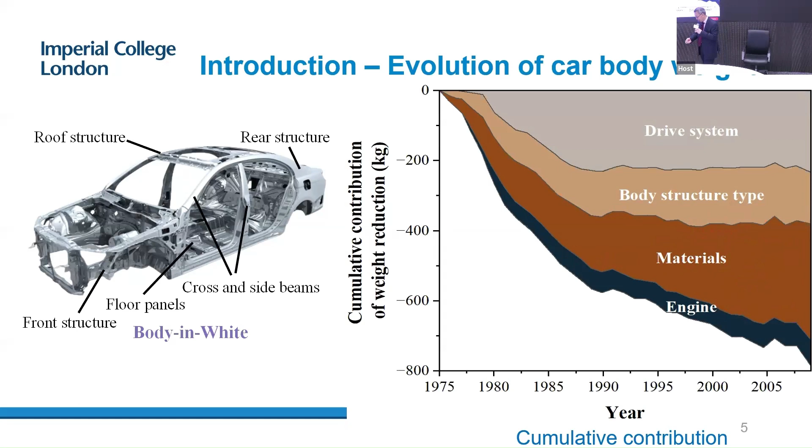Over the last 30 or 50 years, there has been a lot of research on using materials, on how to use high strength material or light alloys to reduce the weight of vehicles. This is a continuous job, and it has a big effect on the car body and chassis structures.

If we consider the use of materials, we collected some data and made predictions from 1977 to 2040. The use of steel becomes less and less over the years, and aluminum should become used in higher amounts, while magnesium alloys stay more or less constant. For the car body and chassis structures, 80% will be metals, and polymers and composites will stay fairly steady because they are too expensive to use for car body and chassis structures.

If we talk about steels, even though they decrease over the years, steel has different grades. Low strength deep drawing steel will become less and less and will be minimized over the years. Current high strength steel will be reduced as well. Third generation steel will increase, and ultra high strength steel will increase because the materials become harder and more difficult to manufacture.

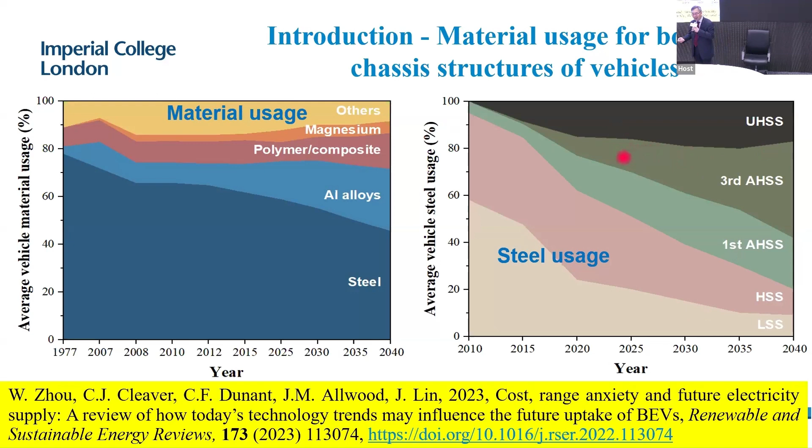If you look at this diagram that shows elongation, this is the relative strength of materials, which is the strength divided by the density. We draw this horizontal line at about 25%. Above this, the materials can probably be formed using stamping technology, cold stamping technologies, and it's fairly okay. But below this it's very difficult.

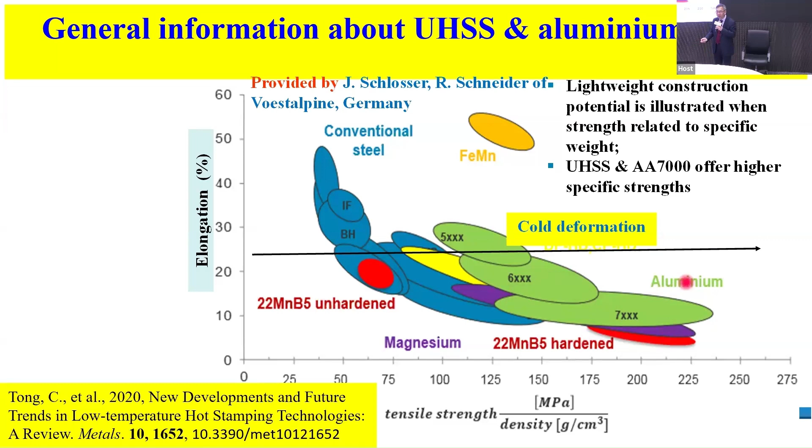We can see aluminum 6000 series, 7000 series, and boron steel, which is ultra high strength steel, are very difficult to form. We have to think of another way to do this. To solve the problem, there is one technique that has become popular in the world: steel called boron steel. They put boron, the chemical element, into the steel to change the CCT diagrams.

I'm not going to talk about the material science here, but what I would like to say is that this is a very successful development for boron steels. Over 500 production lines are available in the world, and every production line can produce 1 million components a year, with a lot of applications.

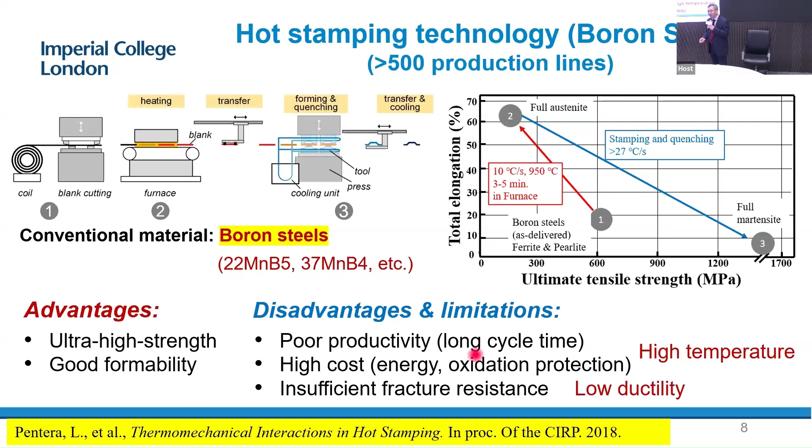I'm not going to discuss the details about the technology, but basically we increase the temperature of the material, then form it and use cold die quenching to get martensite, achieving very high strength material. This has a lot of advantages: ultra high strength, and it saves material while making the components lighter. But the productivity is lower for this, with issues like high temperature, cost, energy, and various other things coming out.

But even so, because of global requirements for CO2 emissions, what we do here can reduce weight and save energy. For example, Volvo has used this significantly over the years, and currently 29% of components on the Volvo XC60 generation 2 use hot stamping technologies. Many use boron steels. This has been a good achievement, and many places have followed up as well.

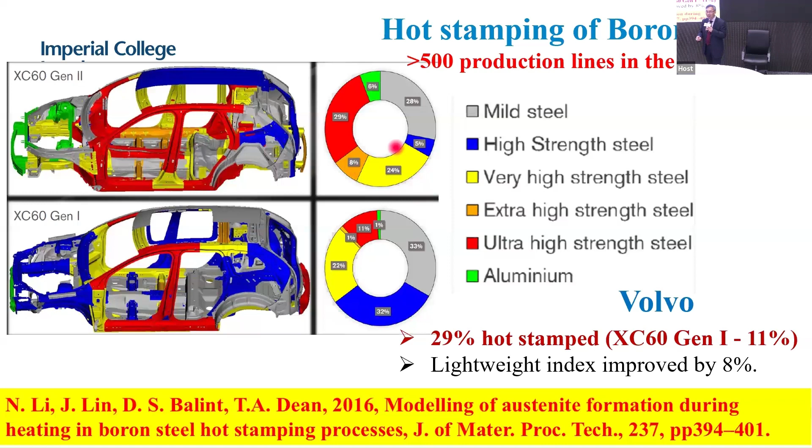In China, over 200 production lines are available nowadays, with a lot of applications for this. Generally speaking, for these technologies we increase temperature to about 900 degrees C, getting the steel into the austenite state, then we form it in a cold die and do the quenching.

I'm not going to give more detailed technologies, but if anyone is interested, you can look at our published papers—we have published many papers on this over the years. However, 900 degrees C is, we think, too high a temperature, causing oxidization, surface problems, and so on. So we tried to develop new alloys which can reduce the austenization temperature by 150 to 200 degrees C, which we call low temperature hot stamping.

Now, we have published some preliminary work, but it has not been used in industry yet. We have shown the advantages of this: we can avoid coating and other issues, and increase productivity significantly.

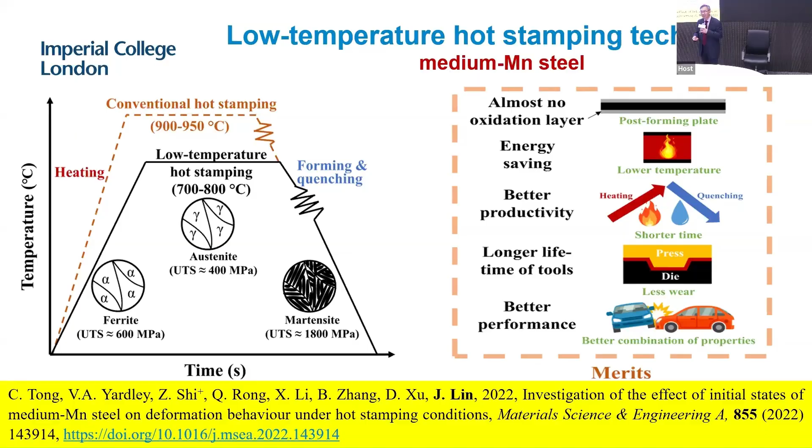Another technique, this is boron steel. We have to use hot stamping, and for new third generation steels we also need hot stamping. For aluminum alloys, there are particular features of the alloy that make it very difficult to form.

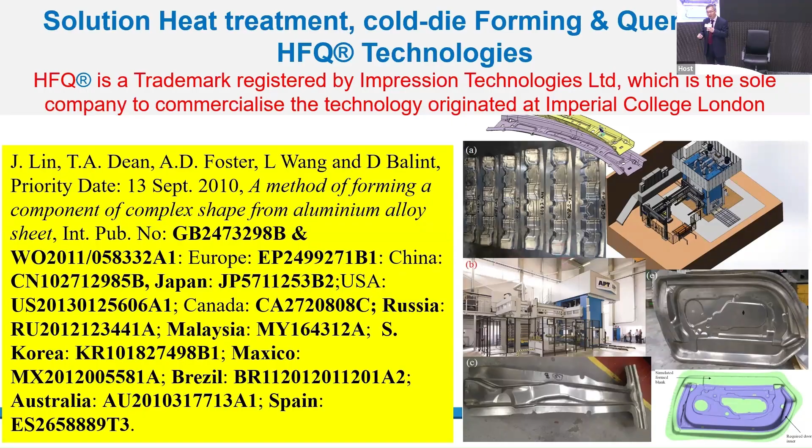So we developed a technique called HFQ technology to form the part, and this is a trademark registered by our spin-off company, of which I'm a founding director. We patented the technology in many countries, including all the countries in Europe and many places in Asia including Japan, and manufactured many components.

This has been used on car body and chassis structures. The first application was for the Aston Martin DB11, and now 24 components are manufactured using the technology. For Lotus, door inners - Lotus was the first company to use our technology. Now Lotus is controlled by Geely in China.

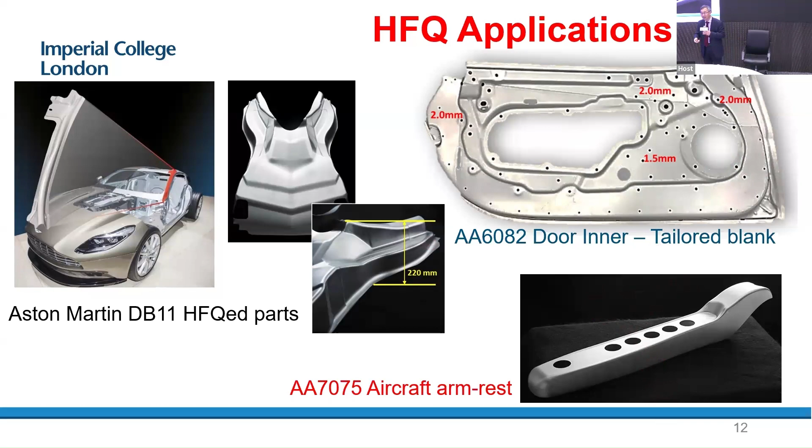And for aircraft applications, this is the armrest for an aircraft seat. Many parts have been manufactured using this technology.

But when we design a manufacturing process, especially hot stamping, it's not very easy. What we need to do first is a basic test: a uniaxial tensile test.

But it's very difficult to generate this data because it's a new technology nowadays, and until we developed the techniques, nobody in the world could generate data to get the forming limit.

The reason is that in the hot stamping process, you increase temperature to a certain level to do the heat treatment for the material. Then you need to drop the temperature to a certain level with a controlled cooling rate. With that controlled cooling rate, you then do tensile or other testing to get the data. But it's very difficult to control the cooling rate, and this is a problem. How do we do this?

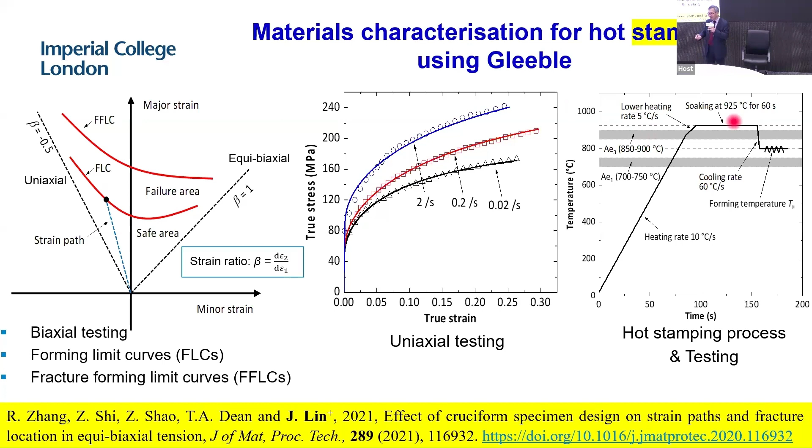There are a lot of international standards available for uniaxial and biaxial testing, but it's very difficult to control the temperature profile required by the materials and the industry process. That's the big issue. This forced us to develop something to generate the data.

What we do is use a Gleeble material simulator - probably people will know this, it's the model 3800. The machine is developed in America by DSI, and we bought this and developed various techniques based on this facility.

First, we create the specimens - here is the tensile specimen and the biaxial specimen. We use a camera, and we paint the specimen. You've probably heard of the DIC method, digital image correlation scheme, to collect the data and work out the strain fields.

But the problem is that when the material is close to failure, the paint disappears or peels off, so it's difficult to get data at a later stage of deformation. This is crucial - previously it was difficult to get data beyond about 60% of deformation, and it's difficult to judge after that.

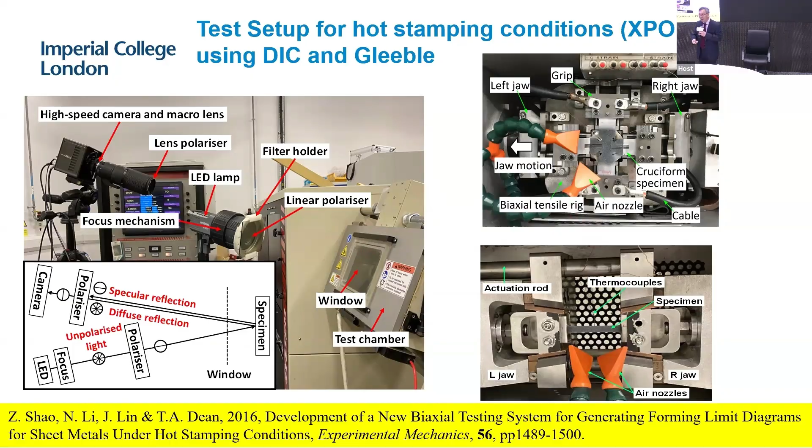So we developed the cross-polarization method, which we call the XPOL method, to get rid of these reflection problems and still get the data. The results have been published recently, in 2024.

Here's an example using the aluminum alloy AA6082. Without cross polarization, we get data up to about 70% of deformation before the paint starts to peel off. At 100% deformation you can see the paint has completely peeled off and you can't get the data.

But with cross polarization, we get data almost to failure - for example at 90% and even 98% of deformation, we still get good data.

For the biaxial testing, we look at areas with over 60% deformation where the paint starts to peel off, because the paint is very brittle and difficult to keep on the surface. We tried various painting techniques, but it's difficult to solve this - at 90% deformation, a lot of the paint has already disappeared.

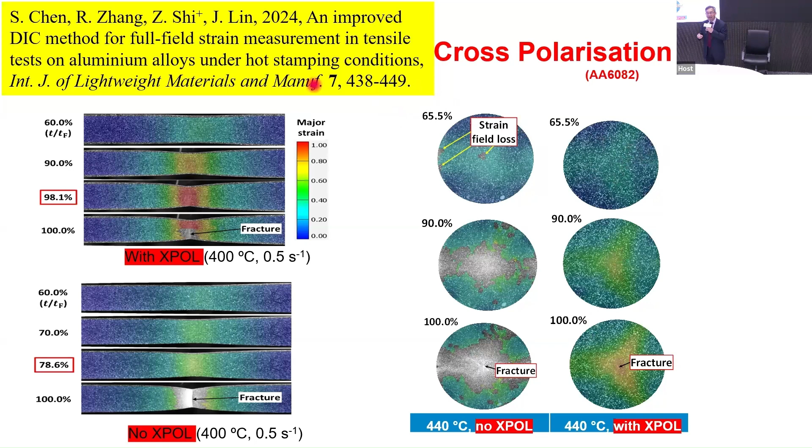But with cross polarization, you can see we can get data almost close to failure. If anyone is interested in this strain measurement using DIC, you can look at this paper for the detailed technique.

Okay, then we do the uniaxial tensile test. For uniaxial tensile test, previously we mentioned about we need to control the cooling rates. This is very important. The Gleeble can do this very well, and then we use the Gleeble to do this kind of work.

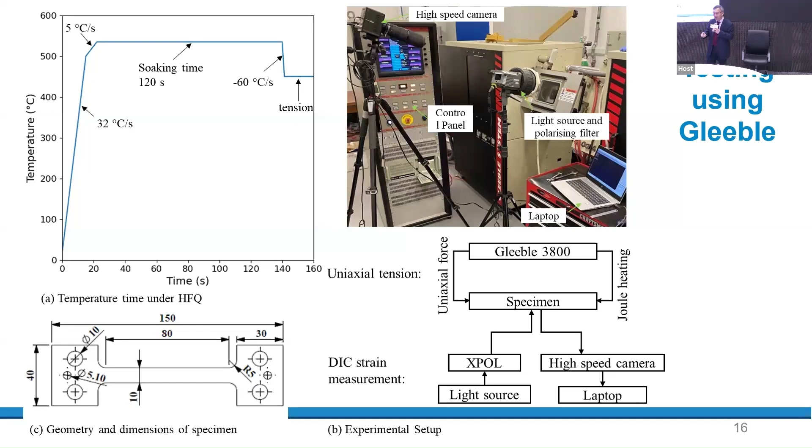But we published a lot of papers, a lot of research on how to control the temperatures. I'm not going to discuss this today.

Our challenge is how to apply the appropriate, proper displacement so that the maximum strain rate within the specimen equals the target strain rate. The target strain rate, for example, we put 0.5, which is very difficult to achieve using traditional methods.

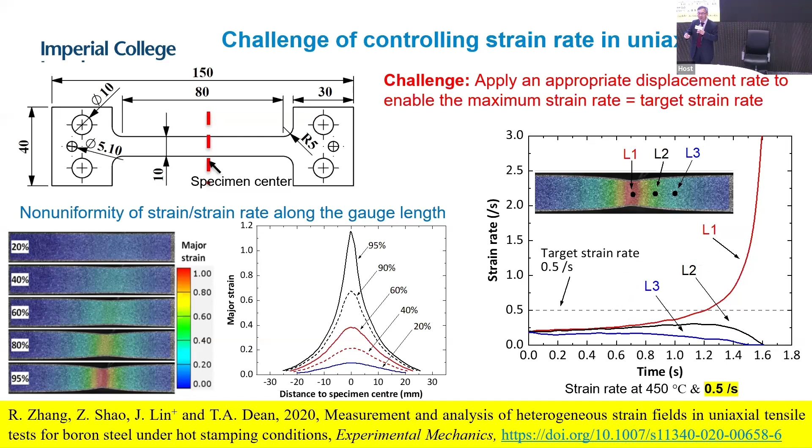Then what we think, okay, we use previous data, we know this is not correct, but we do the learning. People say this artificial intelligence, whatever I say, it's just machine learning, using data-driven experimental work.

We generate previous data, we just input the data in, and then use the data, we try to find the characteristics of the data, how to process this and so on, and present it in proper ways. And then we do the training and the learning.

Then we can set this up and go to stage 3. We can give a choice of what kind of learning method we choose, then generate data to control the displacement for the materials.

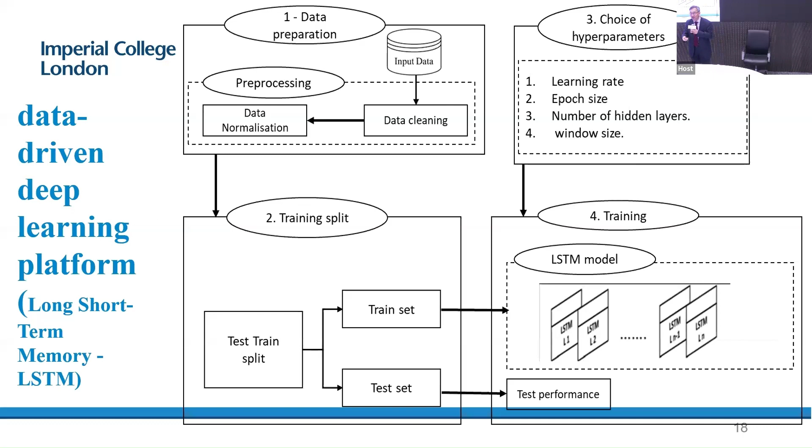At the end, through various previous data, we generate the data, then we know the displacement and the time. For any kind of test, if you give a target strain rate, then the system generates this automatically for you.

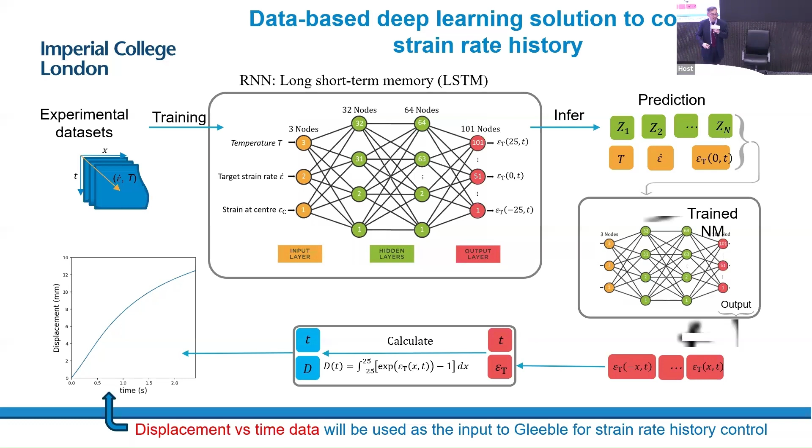Very simple. Just PhD students, mathematics students, are recruited and spend 6 months to generate the job. Very easy. Then we can use the data to compare this.

Previously, for the conventional method, the true strain development is like this. If you say the target strain rate is 0.1, and we try to set 0.1, but previously the strain rate is like this. The error is up to 1000%. The error is very high.

And if we set the target strain rate at 0.5, conventionally it goes like this. But with this kind of learning process, we can get more or less close to the target. The error can be controlled within 15-20%. It's difficult to get rid of the error entirely, but compared to 1000%, this is a huge improvement.

And what we really want is the stress-strain data. For example, for the target strain rate 0.1, this is true stress, and horizontal is true strain. Previously, when we did the test, because the strain rate was not properly controlled, we got data like this. But with proper control, we get data like this, which is significantly different.

For the strain rate 0.5, we observe similar features. And the flow stress error is about over 25%.

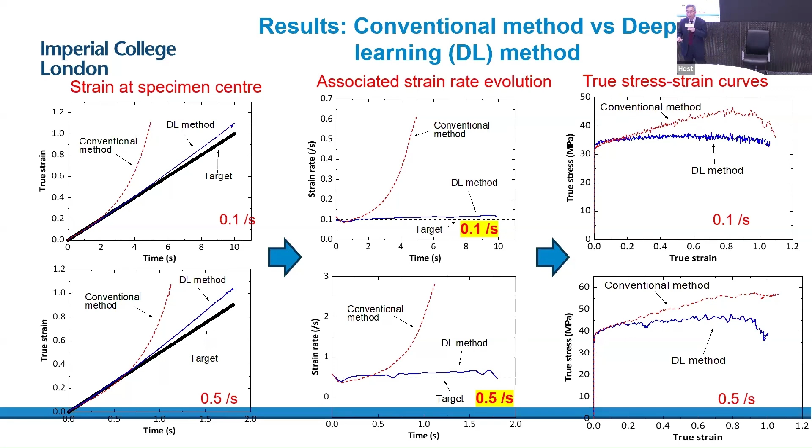Okay, and we tried this for different materials, different strain rates, etc. Then we can say the blue is the real material data, and this color represents the wrong conditions generated previously.

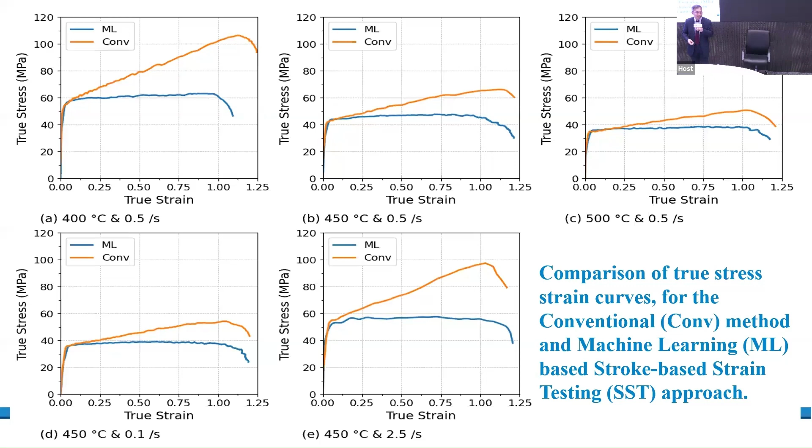Okay, then I move to biaxial testing for this. For biaxial testing, there is the international standard, ISO 12004, which we call the Nakajima test, and it's available worldwide for doing this.

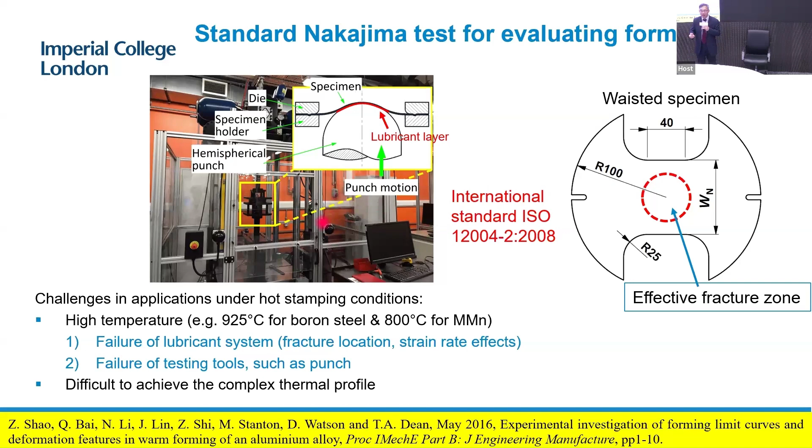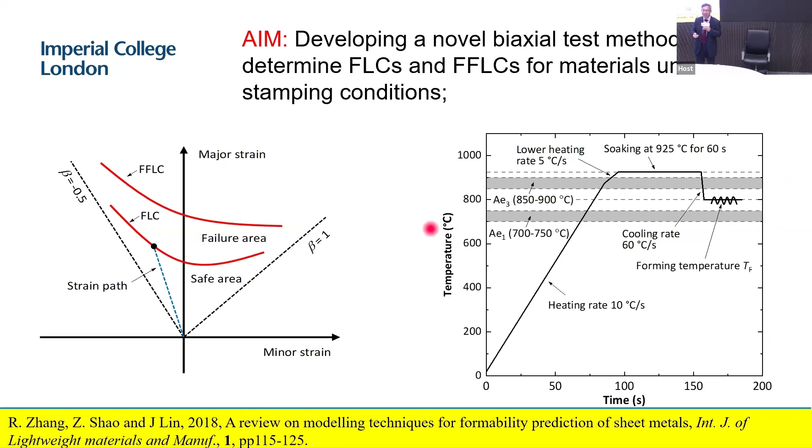As I mentioned before, we have done this for various conditions for many years, but for hot stamping it's difficult. The reason is that we can't control the cooling rates, and that's the problem. On the Gleeble machine, we can control the cooling rates, and this is a significant difference. That's why we use the Gleeble material simulator with proper cooling facilities to control the cooling rates and generate data for this.

It's very simple. The Gleeble material simulator can only do tensile or compression tests in uniaxial ways, and now torsion as well, but it could not do plane stress tension. So we designed a simple device attached to the Gleeble with 4 jaws attached to this kind of specimen, so it can stretch the materials in the proper way.

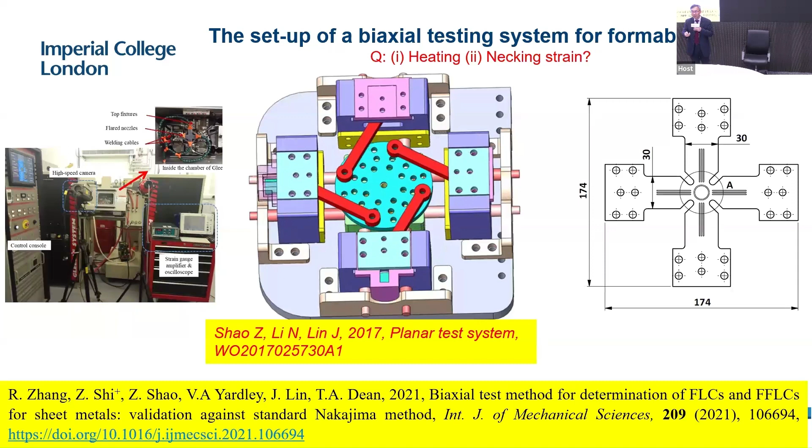This has been patented as a planar test system, and we got a global international patent for this kind of device. If anybody is interested, you can see the paper we published on this.

There are a few parts we need to consider for this kind of design, and one is the specimen design. For this specimen design, we need to consider a few criteria. One is that in the gauge area, in the middle, we want uniform temperature, as uniform as possible.

Another is for the strains - we want in the gauge area fairly uniform strains, and we also want failure to initiate and occur in the center areas. That's what we try to do, but ensuring this is not easy - simple biaxial testing is not easy to do.

Also for the strains, we need to get linear strain paths, but if we want non-linear and path-dependent paths, we should also be able to do this. Therefore we designed various types - we summarized three types of design. I'm not going to discuss the details, but these specimen design technologies have been published in the Journal of Materials Processing Technology.

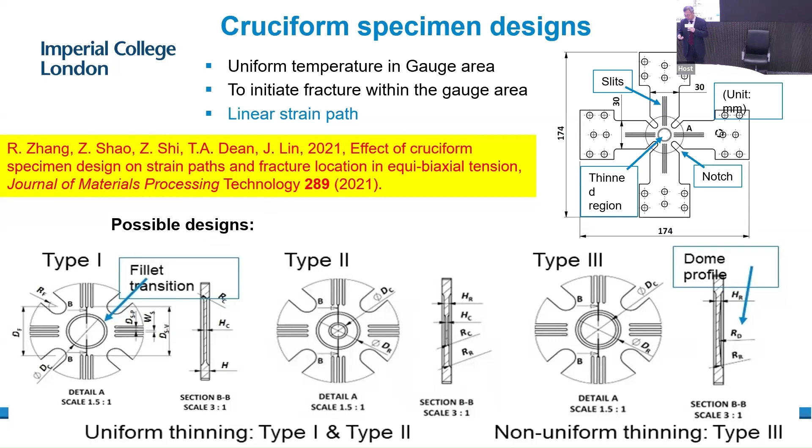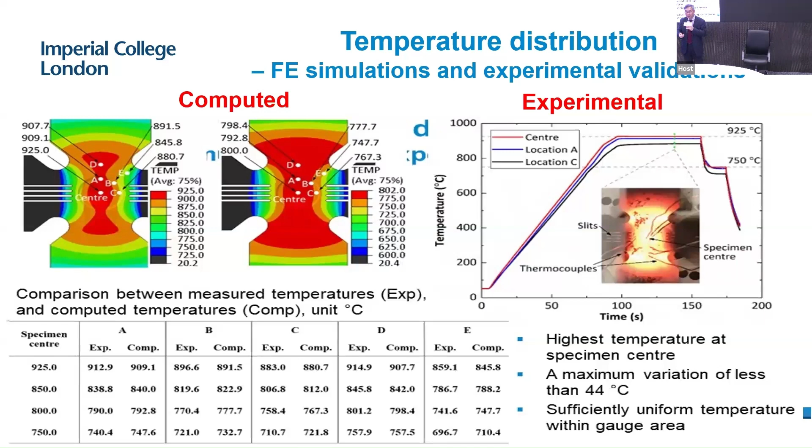Firstly, we look at temperatures - how to heat the materials - because for this kind of specimen with non-regular geometries, it's very difficult to heat. We developed a way to heat this and check the temperatures at different locations.

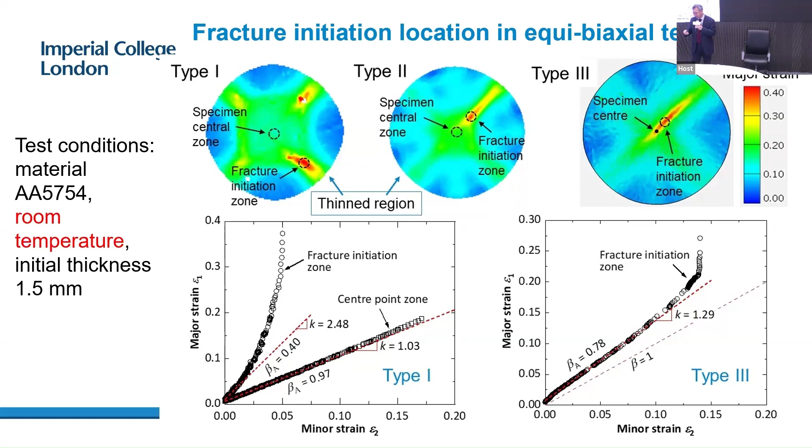Then we look at the failure when we stretch the material - what are the strains for type 1, type 2, type 3? We can see for type 3 the failure occurs almost near the center of the specimen, while type 1 is a bit away from this. We also checked the loading path for uniaxial plane strain conditions, and we can see failure occurs very close to the center areas for this.

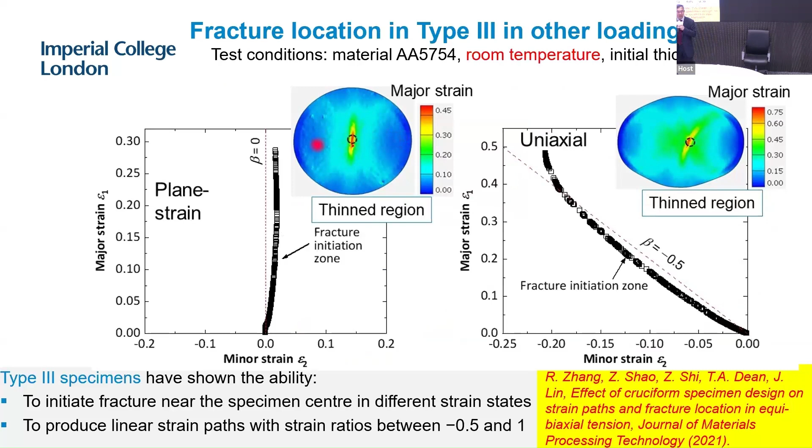Therefore, for this kind of work, what we concluded in the previous paper I mentioned is that type 3 is the recommended specimen design.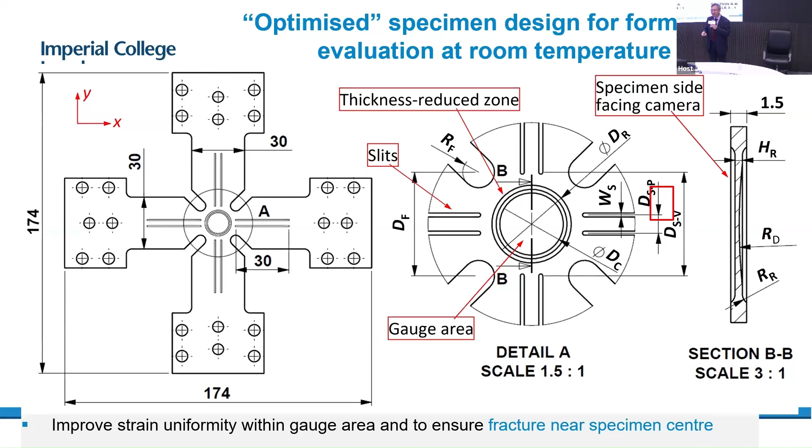What we try to do is create an international standard, including specimen design, testing procedures, and data processing conditions. For this, we try to compare with the current international standard - as I mentioned, the Nakajima test - which was standardized in the 1980s but is not suitable for hot stamping applications, as I mentioned before.

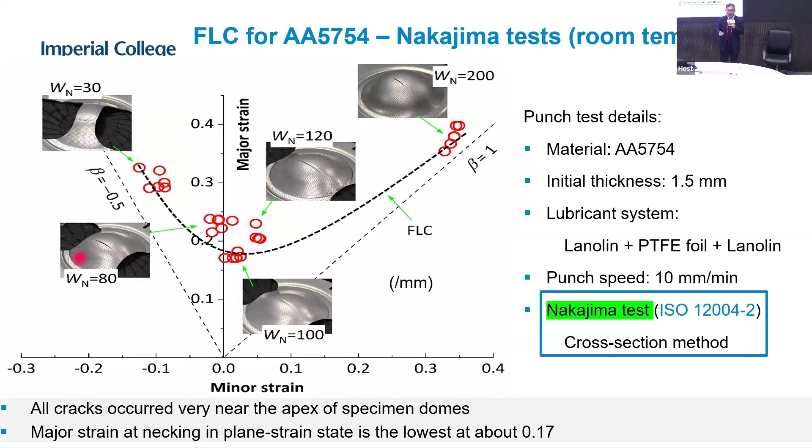We chose the material aluminium 5754, which is almost the most ductile material for aluminum alloys, and we generated different straining states to get data for this.

Then we compare with the data we generated. If you see the data we generated with our biaxial testing, it's more or less the same compared to the Nakajima data. In this way, people could believe that equivalent data can be generated at room temperature, at least in these conditions, because at hot stamping conditions, the Nakajima test would not be able to generate this.

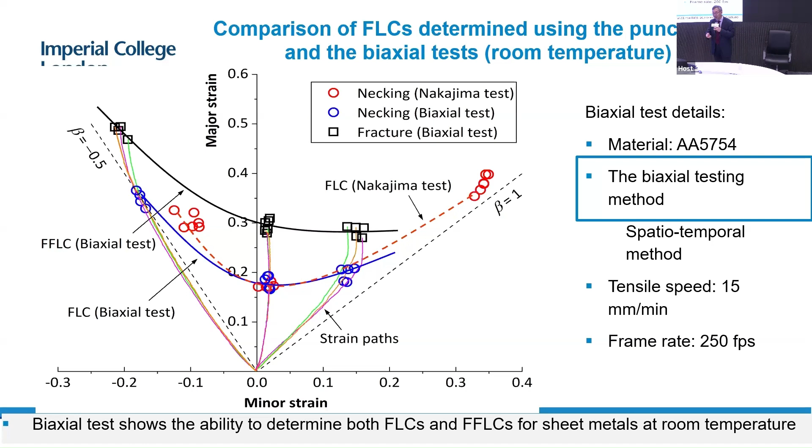Then we need to determine the onset of localized necking. If we stretch the material - as people working on stamping know - one is the necking strain, one is the fracture strain, and people are interested in how to determine the necking strain.

We generate a base zone with a reference zone there. If we plot it, with uniform deformation the thickness reductions would be linear - the ratio equals 1. This is the thickness reduction in the base zone compared to the reference zone, which would be linear. But when necking occurs, this becomes non-linear - it becomes bilinear.

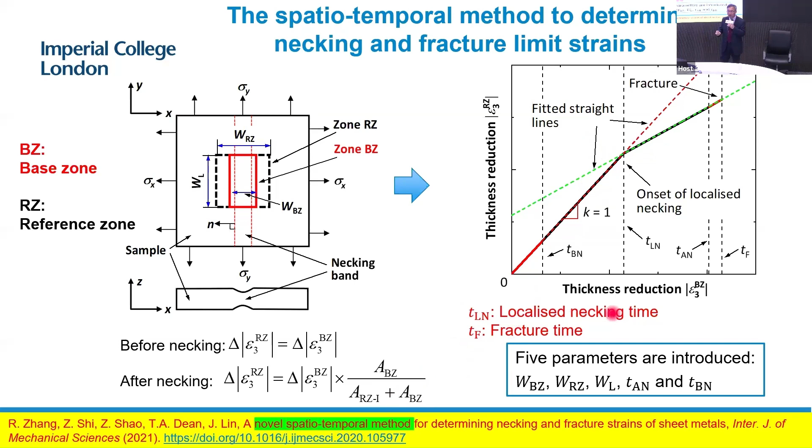And we can find the intersection point, we say, define this as the localized necking. Again, for this one, we created a method we called spatio-temporal method to determine this kind of fracture and necking strain for the material. I'm not going to discuss this, but we have done a lot of work at different conditions.

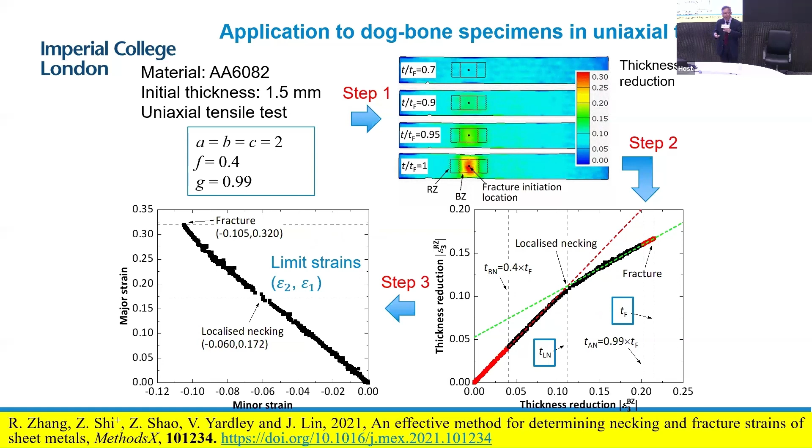This has been done, and validated as an appropriate way compared to the conventional method for the same conditions. Now we can generate data. We can set up, we know the specimen design, we know the testing procedures, we know how to measure the strains, and also how to determine the necking strain and the fracture strain. That's all the data, and all the technique has been established.

And for every part, we publish many papers to try to get the scientific understanding of the problems. And now we try to do the testing for boron steel, which is commonly used for hot stamping. This is a specimen, and we paint this, use the painting, and I'm not going to discuss this in details, and probably most people know Gleeble.

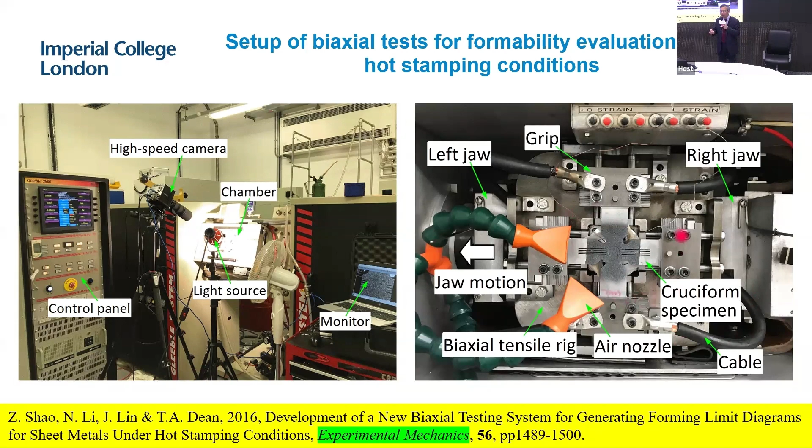With the biaxial test rig we developed, patented, and attached on Gleeble, we did the test for this with different kinds of temperatures and strain rates, and with different conditions, we just show 3: near equal biaxial and near plane strain and near uniaxial tension.

And we can see the failure occurs in almost all of them closer to the center of the specimens, which is what we want.

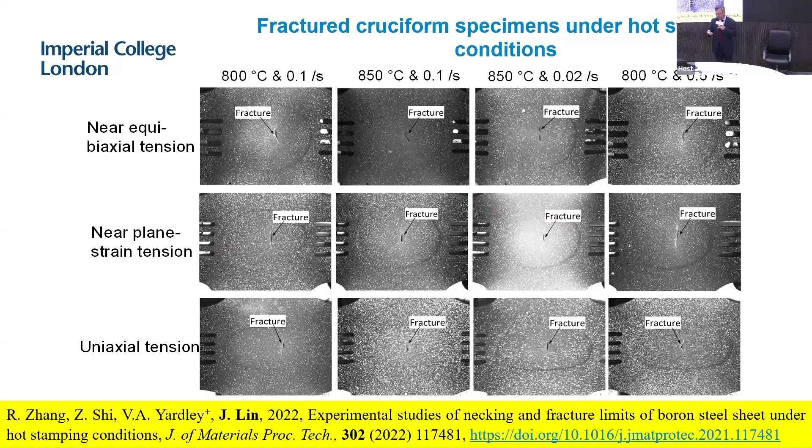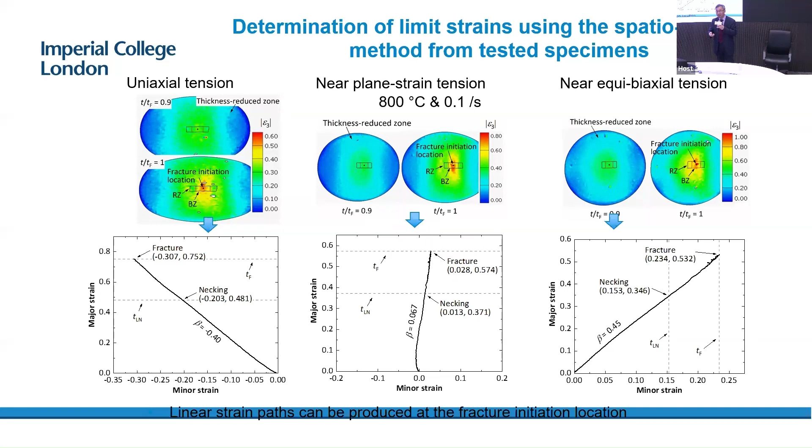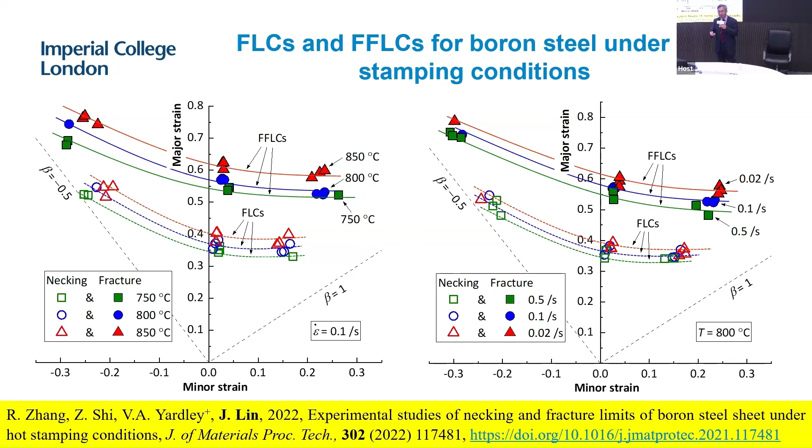Okay, then we can use the method to determine the necking strain and the fracture strain for different conditions. For different conditions, we plot the diagrams. We set the forming limit diagrams with the fracture limit as well, for different temperatures and different strain rates for the boron steel.

Once we get the data, we can develop the equations for modeling. Again, for the forming limit diagrams and hot stamping conditions, we are recognized as the first to propose the method in 2014 to model this kind of behavior.

The method has been specifically applied to boron steel in 2022 to generate this set of equations. This is a general viscoplastic constitutive equation, probably most people know because it comes from engineering, I believe.

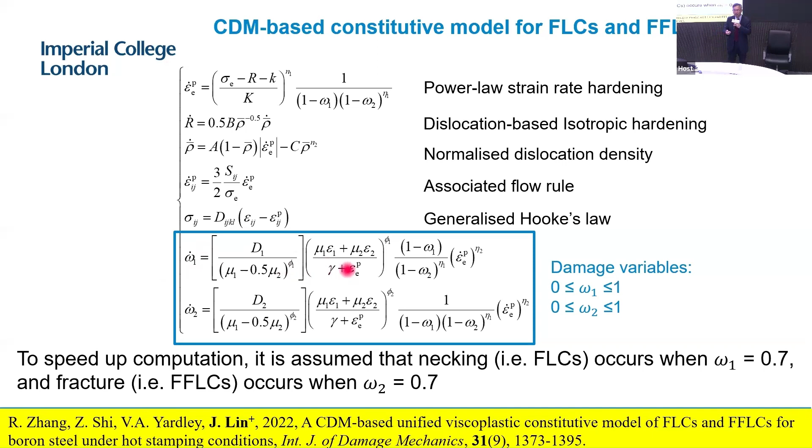And we introduced 2 damage parameters, omega-1 and omega-2. One controls the diffusing necking behavior of materials. The other controls the fracture of materials.

And we put this into 2 steps. The first step is the uniaxial relationships for this. We can generate proper data for uniaxial tensile tests, and then fit the experimental data to determine the parameters like K, N1, and so on, the B in the constitutive equations.

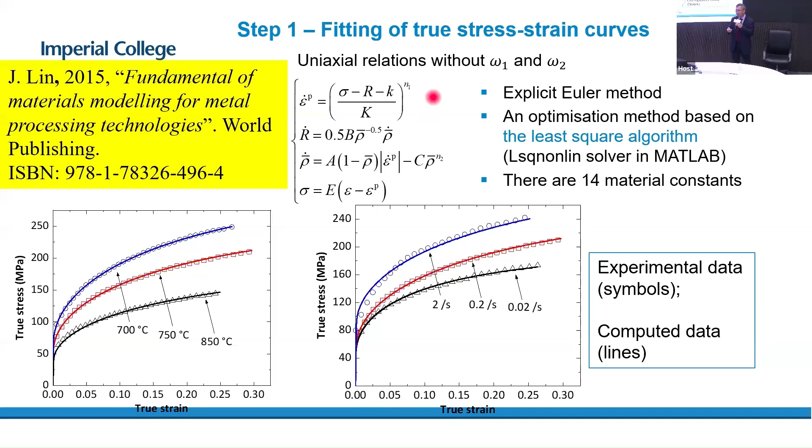The method has been given in my book, Fundamentals of Materials Modeling for Metal Processing Technologies, if some people have read this, I believe.

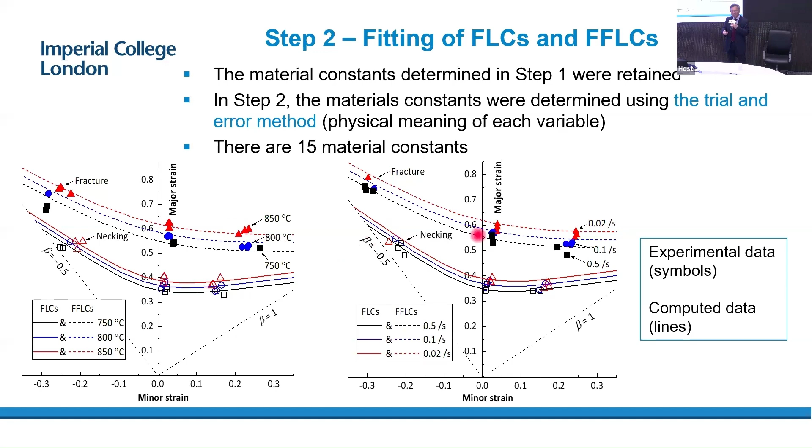The second step is fitting for the forming limit to determine the two damage parameters, and that can be done. We do various kinds of analysis to see the generic features of these two equations. For example, if we change parameters within the equations, we can change the shape and so on. We know which one controls which, and that gives flexibility suitable for different kinds of materials.

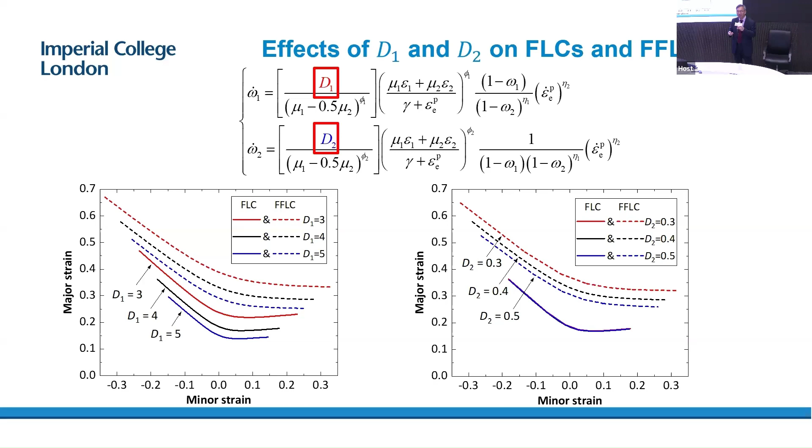Yes, and that's finishing my presentation for the technical aspect. What we try to do is say new material processing technologies need to be developed to meet the new global requirements, because now CO2 emissions and forming light alloys to get lightweight structures, etc.

There are many components I showed in my presentation last week. Those are first-time components that can be made, can be manufactured in the world. Before our technologies, nobody could manufacture those before, and with low cost as well.

Because of all this kind of new technology, we need to optimize these, we need to determine these, and we need to do computer simulations. We need good experimental data. Therefore, we need to generate and advance the experimental science and the technologies to meet the new forming requirements.

The next step is that testing procedures need to be standardized. We still have not done this yet. Last time we ran a European project with 9 countries and 21 partners. We tried to standardize this, but still have not achieved it, because it needs many laboratories over the world to test and verify this kind of technology, which is challenging.

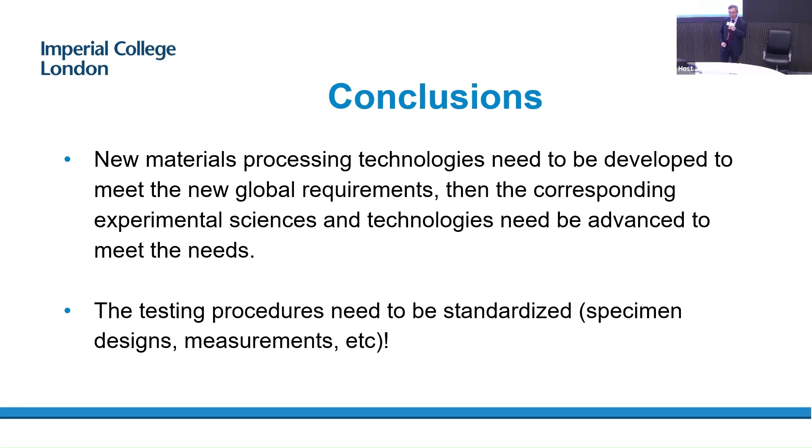I have a question about your tensile test data. You try to tell us that you get two curves, one going up, one almost flattened, and you say the flattened one should be the real data. But my question is, since it's a tensile test, if you get a flattened true stress, that means in the force transducer you get a reduction of the force when you do tension, because the cross-section area is reducing. So that means you get a reduction of force. But can you show us some evidence of the reduction of force? Because normally metal can be hardened by plastic strain.